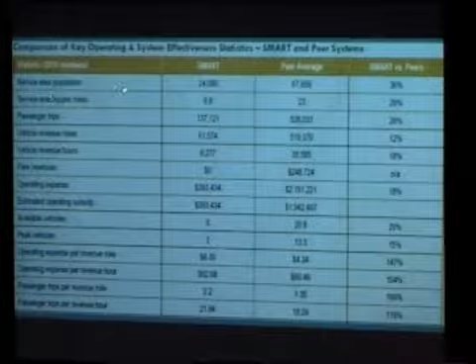They looked at things like, what's the population? Well, we're 24,000 at the time. Average system out there is like 67,000. We're a small community for transit - that's part of the difference there. So we're only running about 36% of the average.

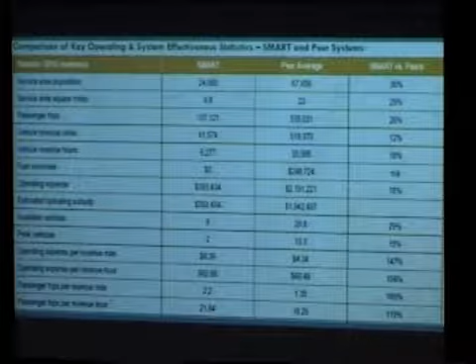How many trips do we see? Available vehicles, how big are we compared to others? What kind of expenses do we see? Obviously in a smaller system you tend to see higher prices, those types of things. So that's the kind of information they gathered on the transit system itself.

Again, you're trying to get a picture of what exists. They did identify that there are probably some transit service needs, both existing and that will continue to come to the forefront as we grow, both in population and footprint, but also in just ridership. So there are impacts associated with that.

There are a number of exhibits like this, maps in the system, again looking at the demographics of the users of the transit system. In this case, these are carless households for that 4 or 5 year period - how many people per acre, households per acre, have cars or do not have cars. You do this kind of mapping because it helps you understand where transit service might be beneficial, because people don't have cars, so transit is a very viable alternative for them if it comes by their neighborhood.

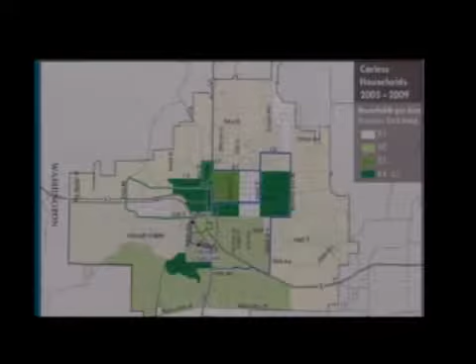So this type of mapping, there's also income-based mapping and some age mapping and different versions in there. As one would expect, a lot of this is probably university related, just like you see here. Where the students live, they may not bring a car to class, so riding the bus is a great option.

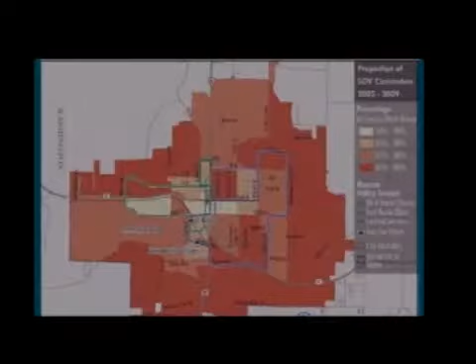Roadway and traffic operations, really, how does it work? How does the system work? How are people driving? What kind of cars do you see? Where do you see them? Those types of things. You see maps like this that are looking at a proportion of single occupancy vehicle commuters.

Remember we had 50-odd percent of people driving by themselves to work. Well, this gives you a graphic in terms of where they come from within the community. So you see a higher percentage out in these outlying areas driving themselves in, whereas closer into town, believe it or not, there are actually lower percentages of people running single occupancy.

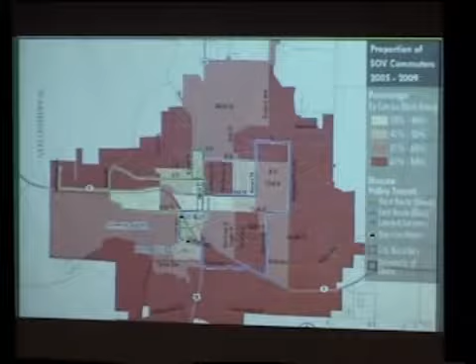Nelson: Do we have any comfort that this transit system will be here for a few years? Are we pretty positive about that? Well, it's in its 12th year. It launched in the spring of 2004, and we're still at it. It's had its rocky moments along the way in terms of who runs it, who owns it, and how we finance it. But the program seems to continue on, and we hope to keep it going.

So is there any guarantee? No. Part of that is because we're relying upon outside funding. There's federal dollars that pay for the operations of the system. We don't have fare box, and there's a lot of debate about fare box revenues and whether they actually pay for themselves or not. So we are very reliant upon federal dollars and then a certain amount of local dollars from the city and from some commercial entities, the university, here within the city. The local funding is not enough to run the program, so as long as the federal dollars continue, in theory, we should be able to continue the system.

Also in the roadway traffic operations, they looked at general volumes, what are the street capacities, how well are they performing, what's the safety, and crash history kind of information that's considered.

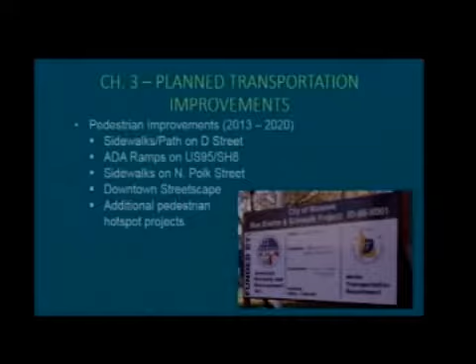Planned transportation improvements. These are really a list of things that were on the books already at the time related to what was going on. This isn't the capital program, but in Chapter 3 they include these, just saying here's some things in that 2013 to 2020 time frame.

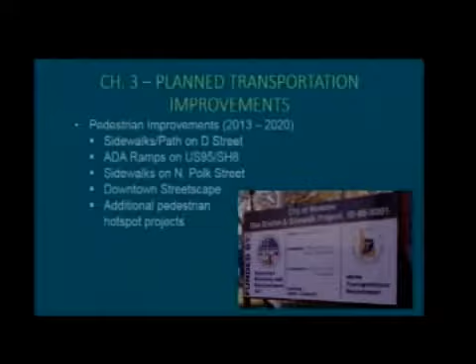Some of these, the sidewalk path on D Street in front of the middle school, that's done. ADA ramps on 95 and State 8, well, we've done, I don't know, 25 of them, something like that. There's more to come. Sidewalks on North Polk Street, that was finished this year.

We're actually looking to extend that work even further north to the city limit through a grant application that was just submitted last week. Downtown streetscape is something that's in the works, potentially will become part of an upcoming bond issue that may go out this coming spring.

Some other additional hot spots were identified through the Mobility Task Force, a subset of the Transportation Commission a few years ago, that looked at problem areas for accessibility and mobility around the community. A lot of those hot spots have already been dealt with, we've built the facilities or fixed the problems, which is good progress overall.

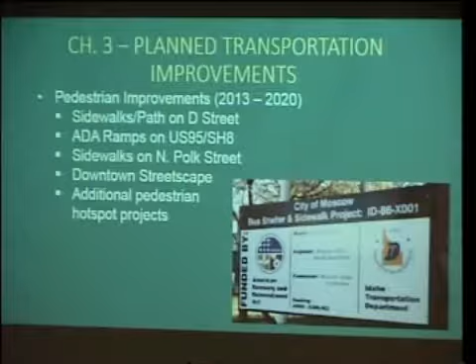I also looked at some of the roadway improvements. A Street, Peterson to Home, that thing's been on the books forever. It is now slated and fully funded for construction starting in 2019, so the end is in sight.

Mountain View Road, the 6th Street roundabout down to Joseph Street, is a grant-funded project that currently does not have a construction year, it's out past 2020. And the White Avenue to State 8 piece does not yet really have any funding. So projects that were in the overall plans, not all going to happen by 2020.

Next chapter, and we're into a different section: establishing the multimodal strategies. Chapter 4 covers roadway and traffic, what's going on with streets and vehicles. This is where it starts talking about road connectivity—is the road network connected so that people in their vehicle can get from one part of town to another without major reroutes and detours?

They looked at different quadrants, and this is just a general summary. In the northwest quadrant, one of the big issues is that there's really no connection between US 95 and State Highway 8 in the form of an arterial. Someday that will be the Rodeo Drive extension around to Farm Road, so long term there's a plan, but it doesn't exist today.

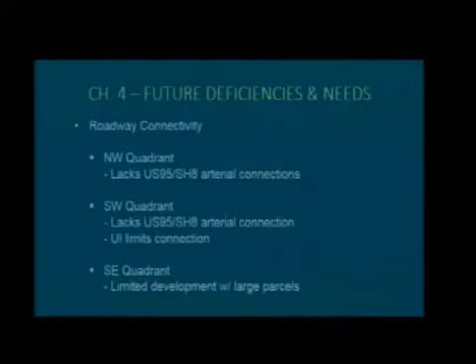Southwest quadrant, same kind of situation, no arterial route really around the southwest part of town. People cut through the university, which is not great, and the university actually limits connections because the land use there prohibits arterial road construction. Southeast quadrant, the comment was that there's been limited development out there—south of the highway, south of East Side Marketplace, with a lot of really big parcels—so there's room for connectivity as that property develops.

Northeast quadrant—what streets are we talking about? Highway 95 does connect to the Pullman Highway, and 95 and State 8 connect, but there's no connection between those up in the northwest quadrant of the city. The plan ultimately is where Rodeo intersects US 95 on the north end, it will swing westerly and then south and tie in at Farm Road by the Palouse Mall, creating an arterial route connecting those two highway systems in the northwest quadrant.

The idea is that you're providing an alternative route so not all the traffic has to go through the downtown core, but that's what we're lacking—an alternative connection. Yes, needed.

Yes, because we don't have that alternative connection, so there's no choice but to come down at least to A Street and go across, which has its issues right now, or come all the way down to State 8 and go across. When you're limited to those kind of choices, congestion becomes a problem.

Those three quadrants - the northeast quadrant, generally east-west is not bad in the northeast with the exception of 3rd Street. Obviously 3rd Street doesn't go through. They do talk about Mountain View being the primary north-south route, but it's really the only one on the east half of the city. So they suggested an additional north-south route, probably a little further east, would be beneficial.

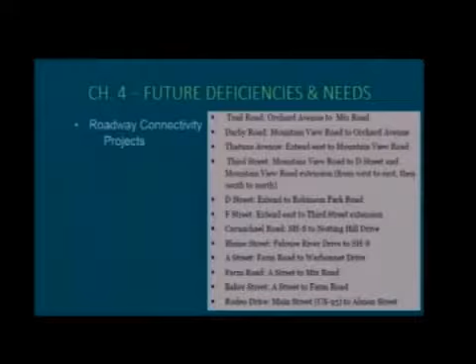They suggest some road connectivity projects in this chapter, and this is just pulled right out of the plan. I'm not going to go through all of these, but you can see what some of them are. There's the A Street, Farm Road to Warbonnet - that's an extension. That Farm Road, which I was talking about, coming around over to Mix, which would eventually tie into Rodeo, as I was just describing a minute ago. Things like that. So these are primarily, at least collector, if not minor arterial class streets.

Wes: I don't know whether I was going to wait till the end to ask a question about this, but maybe I'll ask it now since we're here. So when you see in the plan that's associated with this connection, are those right-of-ways secured?

Not necessarily, no. A lot of those are just planned corridors, and in a few cases there may be some right-of-way, but generally speaking it's, hey, this is an area that we need to make sure that right-of-way is obtained through the development process so that those roads can be extended as appropriate to support the transportation network and the land use. Because that impacts us, since we're approving subdivisions that might put a house right in the middle of one of those connections.

That's exactly it. Very good, very good. So yes, that's what those maps are intended to do - inform everyone of the need to help preserve those corridors for those purposes. Our thoroughfare plan reflects a lot of those alignments.

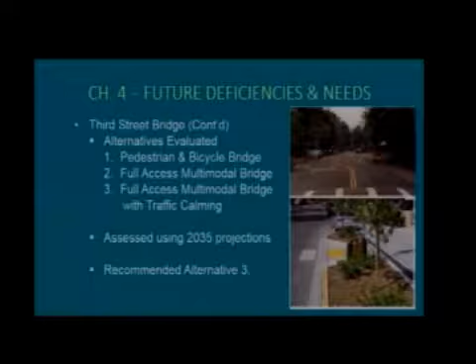That option came about because there were concerns that if the multimodal bridge was put in and traffic shifted from B and D and 6th Street over to 3rd, the volumes on 3rd Street might get excessive and detrimental to the neighborhood. So the traffic calming concept was, let's back away a little bit from that traffic. Traffic calming techniques tend to slow the speed, which is always a concern around activity centers, but also at times discourage people from using that route. So there's a balance — if you're opening it up, you want people to use it, but you don't want it to get carried away, so you restrict it a little through a traffic calming process.

That was the third option, and they modeled all the traffic anticipated throughout the system. They used the 2035 projections in their modeling, and in the end, the plan recommends alternative three, the full access multimodal bridge with traffic calming.

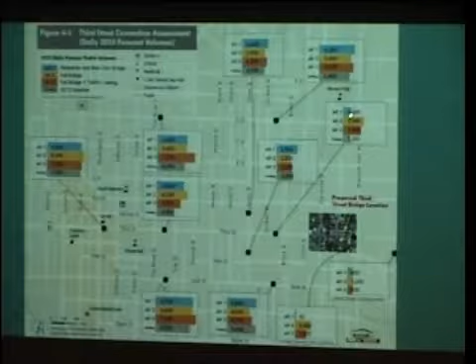They did that throughout the system, and that gives you an idea of how it's all set up. In some areas you'd see increases—obviously places east of Hayes would see vehicle volumes go up if the bridge went through. Offsetting that, you'd see decreases on the north-south of Hayes because people wouldn't have to turn on Hayes to continue on to Mountain View. So that's what these numbers reflect.

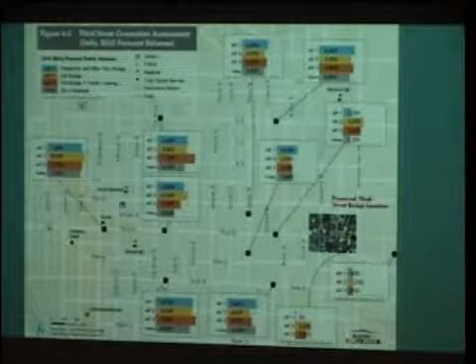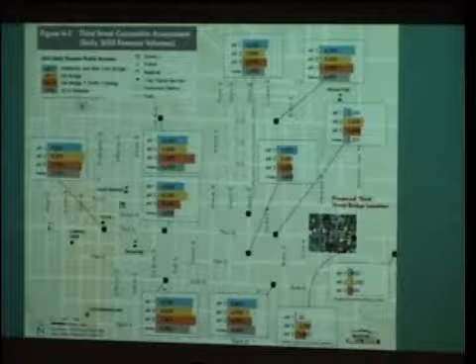How did they get those estimates? The estimates are based upon the traffic volumes that were there at the time, the information we had available from all the traffic counting data the city accumulates every year in our normal annual traffic counting program, and then they did computer modeling simulation of the way traffic flows on a street network system.

This is something you can build into a model—they do it all the time. It looks at the characteristics of the road system, what kind of volumes we have, ties all the growth projections into it, and the model ultimately says we would anticipate vehicles are going to flow here or there. As you change the constrictions to flow, like traffic calming, the model says people start choosing alternate routes, which is intended to reflect the reality that people will choose alternate routes. That's generally how the modeling is done when it comes to traffic.

It was confusing to those of us looking at this, that in 2012 it said there were 8,000 cars on 3rd Street, and then on this model it said 5,000 cars.

It all depends on where you are on the street. There are different counts all the way along the corridor, so it depends on which counts you're looking at and at what point in the corridor.

If you look at the map, it looks like it's exactly at the same place. I'm looking at 8,368, and it's just—how can it go from 83 in 2008 and 2011, actually the same figures, to all of a sudden it's 5,000? Different numbers, different years. You have to really work a little hard to explain that.

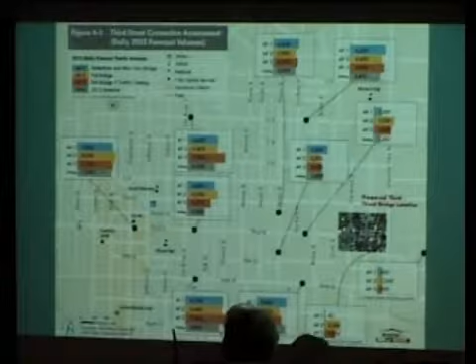I'm just saying I've got two maps, this map and one he gave me, and they both show two different figures, and I'm just asking why. Was one not at the 8,000, same place? Same place, right here on 3rd Street, just south of the high school. I didn't invent it, he gave it to me at least a couple of times, and it says 83,000 or 8,300, so I'm just asking that question.

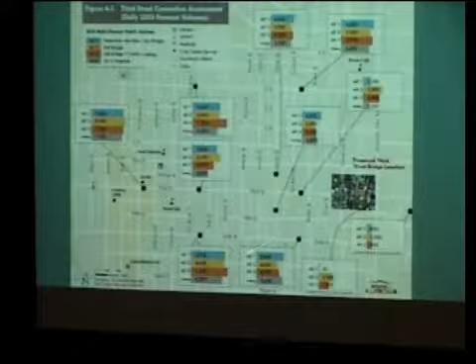As you continue east, the volume on 3rd Street decreases. As you continue east on all these corridors, the volume decreases as you progress.

It depends on the point. What really matters here is what's the change that occurs - what's the impact of doing something in the system. Does the volume go up? Does it go down? What's the magnitude? Is the starting number 5,000, is it 8,000? It varies from year to year and block to block.

I can't answer that one right now. But between 2008 and 2011, it didn't vary at all in the numbers you've given. You can look at the map here, we can just look at it together. Then 5 or 6 years later, when the traffic or Moscow population has certainly increased, now all of a sudden it's just dropped off 3,000. I find that to be...

So what is the source of what you're talking about? What is the other source besides this? What urban traffic volumes are you quoting from? Les gave me this, that's very general. He's given me this, and I'm asking why these two figures are so different.

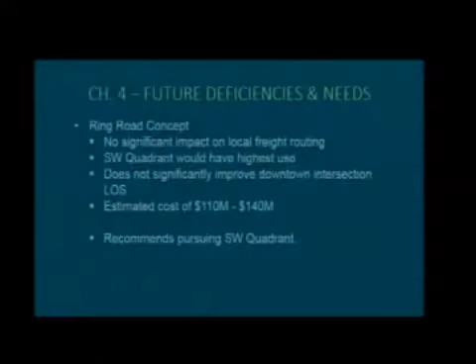Okay, so just to carry on, because I think I'll answer most of these questions. The concept, what they found based on their assessment — and they've seen these before, so they're used to them — was that they did not anticipate a significant impact on the local freight routing, because we just don't have that many trucks that would necessarily use the ring road if they're doing local deliveries. Now, you could have an effect on the chip trucks that are rolling from Sandpoint to Lewiston or wherever they go.

They felt that the southwest quadrant would have the highest use, and part of that thinking is we laid that one out with the idea that it could become part of a west bypass, highway bypass of the city of Moscow, northwest and southwest. The southwest quadrant, based on an origin-destination study done by ITD back in about 2004 or 5, indicated that quadrant would most likely see the highest usage because people are coming from either south or from the east and then wanting to go on to Pullman. So that's the leg, that southwest quadrant, that if they had a corridor, they might use. Our consultant agreed with that.

So southwest quadrant, highest use. They felt, though, based on these numbers, that it does not significantly improve the downtown intersectional level of service. It didn't really do that much for a price tag of roughly $110 to $140 million. So if you're not seeing a great benefit from it for that kind of cost, maybe it isn't something you pursue.

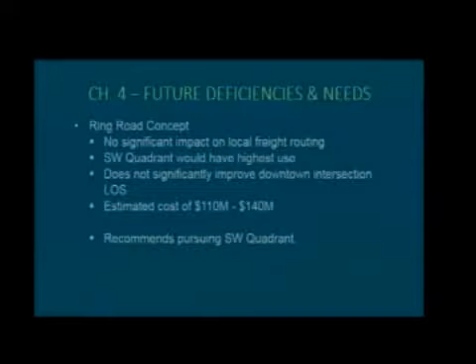So if we were going to do that, that southwest quadrant could divert the biggest piece of traffic out of downtown of any of them. It could also potentially act as a connector between the highways, and could also be part of a west bypass at some point in time. It was always thought to be federal funding, not local, and it would involve interstate cooperation.

Certainly. Les, I take it that the planning, either us or the firm, trying to find a solution for Third and Main and Jackson is just very difficult. I take it they couldn't think of a brilliant other answer. We did not ask them to look at Third and Main and Jackson.

We did not, because that location's already been studied. The study that Walter just referenced said, yeah, take half the sidewalks, take all the parking, add lanes. There goes all your other goals. You can punch the downtown traffic through. There you go. Give it up.

What Walter did not say about that study is at the time the city said, we don't think so. And so they actually modified the conclusion of the study that said, yes, you can do this, but we recognize as a community the city of Moscow does not find that as an acceptable alternative.

And they are looking at a ring road concept, and they should explore that. That's where that study ended up. So yes, you could funnel all that traffic downtown, but there are impacts on business, quality of life, and our after-hours events on Main Street. All those things make that option probably not real great for us. Thus the ring road.

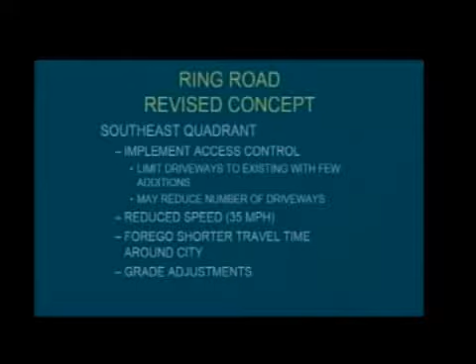But along with that, here are some of the caveats. We would want to implement access control, still trying to limit the number of driveways—not prohibit them, but limit them to what's existing, with a few additions here and there where there's no alternative. We'd possibly reduce the number of driveways in some areas, and reduce the speed from 45 or 50 down to 35. By doing that, we forego some of the shorter travel time around the city since speeds are down, and there could be some adjustments needed in certain areas, like right here. Let's see, where am I?

I have to orient myself real quick. Okay, here's Mountain View. Right in here, there's this fairly deep hole right next to Frank Bennett's house where the road just drops down and comes back up.

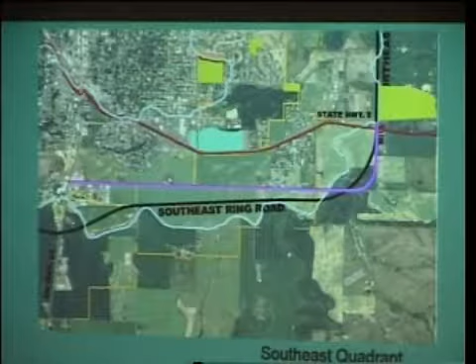We'd have to do something different with the grades to make a higher speed roadway in there work. So that was the thought of Transportation Commission as the alternative to the southeast quadrant for the ring road with those conditions and caveats.

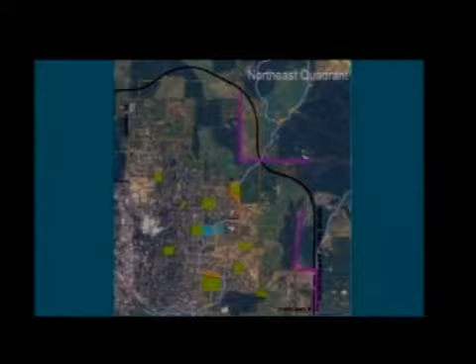Northeast was a little more challenging. This map shows in the kind of magenta purpley color the existing roads that are out there, and if we're going to try to use those, great, but generally they don't connect very well that far out. They wander off and go off to the east, so that doesn't really work.

So these were sections, Mountain View, Darby, and Mill, and Robinson Park Road, that we thought, well, okay, here's some routes that are existing we could use, but we'd probably have to connect them in some fashion. So we did identify, okay, tie it here to here, some kind of a route over here, it can wander depending on ownership, topography, et cetera.

So that became kind of the alternative, and these would really drop to more of an arterial class roadway, like a minor arterial class roadway system, rather than a more principal arterial that you might see with a ring road or a highway.

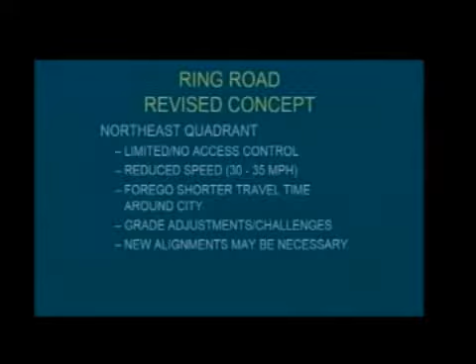And again, some caveats: limited or no access control, reduced speed, 30 to 35, depending on what the land use is around it. Again, the shorter travel time is foregone. There are some grade challenges, particularly lots of little ridges that run around up in this area. So that's a challenge to consider, and some additional alignments may be necessary to tie it all together.

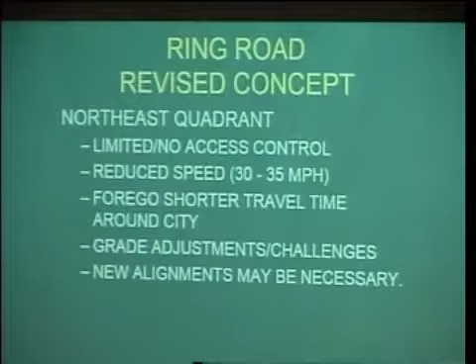So that's the work Transportation Commission did, somewhat as a result of what was in the multimodal plan, recognizing that when we're dealing with the county and their land use planning, and our own land use planning updates to our comprehensive plan, we need to have some idea what the ring road now looks like and how it's going to be categorized. So transportation has done that work.

Okay, so back to the plan. Chapter 4, intersection operations. This is, I think, the last section in the Chapter 4 deficiencies portion. It really looks at a multitude of intersections around the city based on the 2035 volume projections and said, okay, where are we going to have problems?

Well, here's the list. A lot of these you'd expect where the highways come together, or Styner intersects the highways on either end, 8 and Mountain View, White Avenue, Mountain View, no great surprises, Line Street, A Street, which will be addressed, by the way, in our A Street project in 2019.

Was there any level of service analysis on the 3rd Street and Mountain View intersection if the multimodal bridge was installed? Again, a limited number of intersections. That one really, as it exists today, didn't have any of that, so the plan didn't address that.

So some of the operation recommendations to improve those situations is reconfigure the A Street and Line Street intersection, which our current design does. It actually makes A Street the through street east-west, so we wouldn't have to stop there. Line Street northbound, as we have it designed, would have a free right to go eastbound. And if you wanted to go left, you'd have to stop and then make a turn.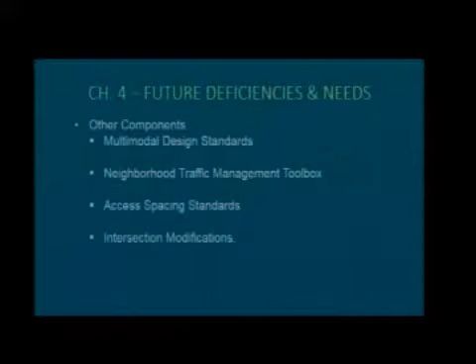Okay, long chapter. Chapter 5, active transportation strategy. This is where we get into the bike and pedestrian modes. They recommend that you have a variety of facilities out there. When it comes to biking, this is a dedicated bike lane, actually next to parking in this case. You could have on-street biking. You could have widened lanes that include bikes.

You could have dedicated bike lanes. You could have buffered bike lanes. You could have separated paths, et cetera. So look at all options to give yourself tools for different situations within the community.

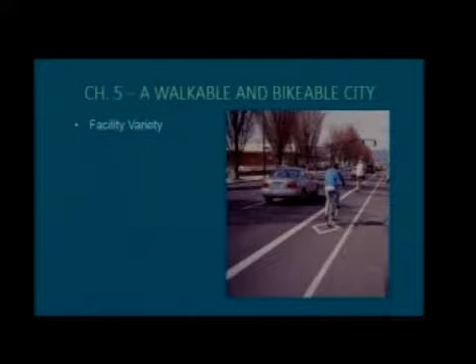Okay, and we've done some of this now. They recommend some education and outreach programs, which are things we're working on today. They also recommend development of a signage and wayfinding plan. So what you see here on the right is our signing and wayfinding plan.

This is just a portion of the overall city, showing a portion of the bike routes here in green, blue and black - different levels of difficulty. It shows the type of facilities - these little red dots are sharrows up and down Main Street. These railroad track-looking marks are bike lanes that would be going up 3rd Street by the high school. You'll see those next spring, by the way.

And then all these little circle designations represent destinations - X1 is the downtown core, V1 is the Latah Courthouse, R1 is the high school. Those were identified destinations that people might want to reach on the bicycle network.

And then these little guys here, like number 2, number 16, number 1, number 75 - those are locations for signs, for wayfinding signage.

So in this particular instance, number 2 is an intersection of a green route and a black route. At that point we need signage that says turn right to go here, turn left to go there. So this map has been developed - the Transportation Commission worked on it as well. We're refining the number of destinations on the signs so we can start manufacturing them, and those will start going up next spring, maybe even this winter. So that's in the works.

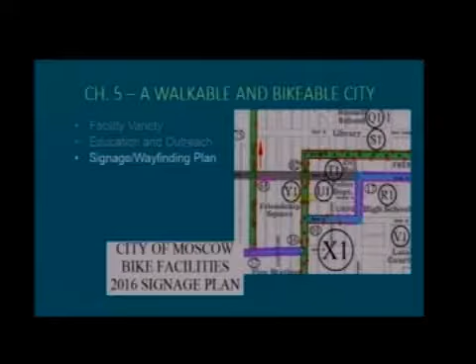And these came out of this bike facility signage plan, 2016. That little green line above the 1912 building - that ends right there, though, doesn't it? It has a turn, this little green guy right here?

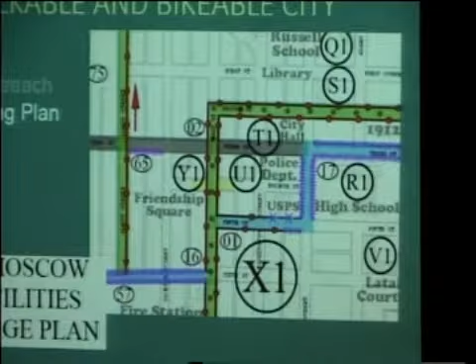No, this is actually part of our Greenway, a route that's already signed in terms of the route itself. It wanders over here and up into this part of town, takes it all the way up north of East City Park, to the north side of the middle school. It now traverses that brand new trail we just built this summer along the west side of the middle school parking lot, goes all the way south on Cleveland clear down to the fairgrounds, swings westerly, works through that neighborhood, comes out near Lewis Street, crosses the highway, takes you onto Main Street, and brings you right back to here. That's the Greenway route, and that's in existence today.

The sharrows are on the ground. The Greenway route signs are in place and have been since about June. So no, it doesn't stop there and drop off at the edge of the map.

Yes, sir. So wayfinding signs were added in Fort Collins, Colorado, and I was biking around there, and one of the things that was really annoying was the size - could I just interrupt you for a second? Sure. I should have said this before, but when you ask a question, could you please say your name so it goes in the record? My name's Robert Peckendorf. And your address? 611 Hathaway Street.

Former Transportation Commission member. That's true. Thank you. It's nice, we're just trying to keep track of good minutes.

When I was riding around the city, they have these wayfinding signs, but the font is really, really small. Too small. You don't have to actually get off your bike, but you have to get really close to them because they try to put a bunch of information, 6 different destinations, on there. Too much. Ideally you'd like it big enough so you can ride by it, but at least having that size as a consideration would be really nice.

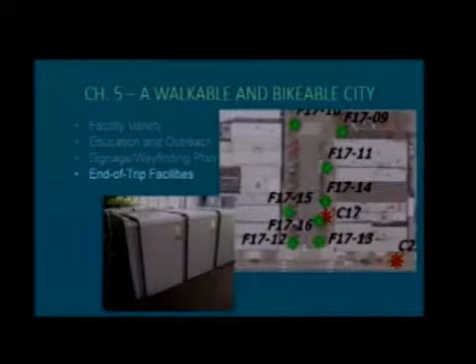On the left, this is a picture I took at University of Washington—this is covered, locked bike storage. You ride your bike there, and of course it rains in Seattle in the winter, so you don't want your bike completely soaked at the end of the day. You rent one of these things, put a bike or maybe two or three in, lock it up, and at the end of the day nobody's messed with it, and you hop on and ride it back to your apartment or wherever you live.

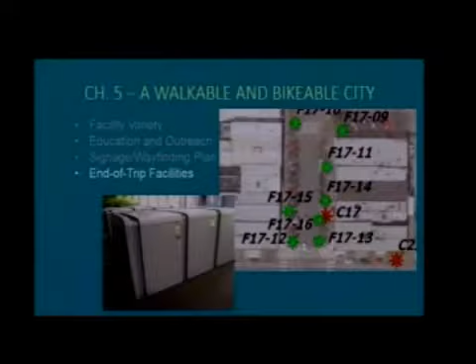Obviously these kinds of things take a big footprint and have a pretty good cost, but there are other types of facilities, whether it's covered bike parking like the university has looked at a little bit—I see Becky's here and she deals with some of those things—or other amenities beyond just parking, maybe repair stations or air stations to pump up your tires, different types of things like that. So it's recommended that we consider end-of-trip facilities to help promote bicycles as an appropriate alternative mode.

And encourage people to ride their bike to work or to business, then have facilities that accommodate it. Maintenance policies—take a look at our maintenance policies. Are we sweeping the roads sufficiently? Are we clearing snow sufficiently? Those types of things.

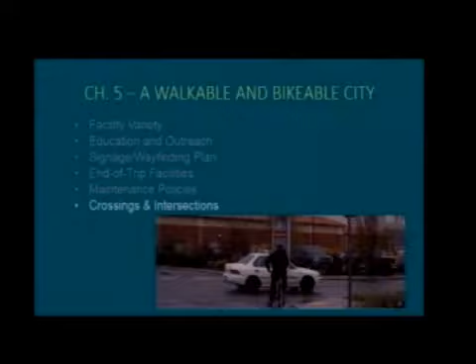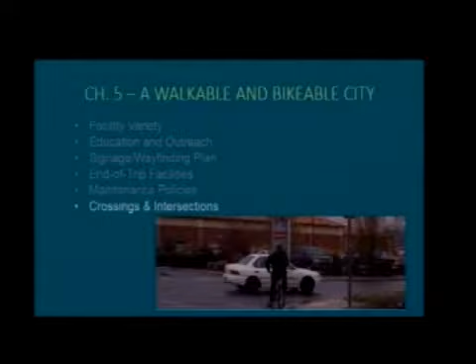And crossings and intersections can be a real detriment to folks, either on foot or on bike. This happens to be near Gritman, just an example out of the plan, where there's a potential conflict that people have to navigate. One instance we're real happy about in terms of its current progress is this one.

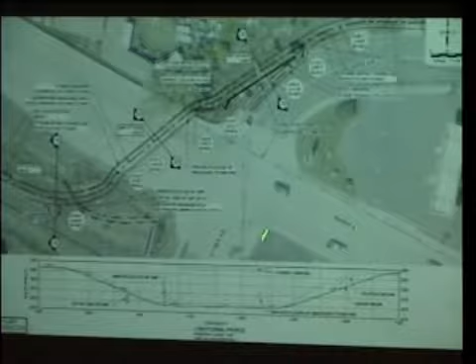This is the intersection of State Highway 8, Troy Road, and White Avenue—Steiner, right? Tesoro gas station here, Paradise Creek right about there, cruising through. Right now this intersection has no control on the highway—it's got stop signs north and south. It's not as wide as it used to be; it used to be tremendously long to cross. ITD narrowed it a bit when they rebuilt it in concrete, but it's still kind of a wide open area, speeds are still up there a little bit, and pedestrians don't always feel comfortable running across this roadway.

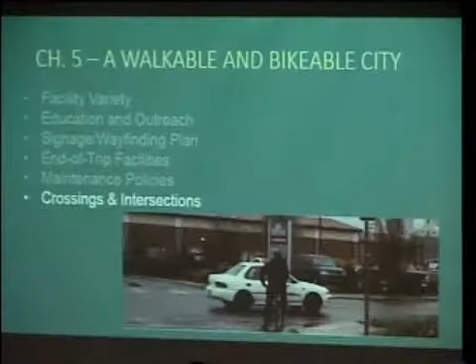So this is a project on the verge of funding through the state. It's been selected, and just needs approval from the ITD board, which I think happens early next month, to build an underpass that'll take a trail underneath the highway alongside the creek and back up to the Paradise Path. So that's in the works as our first major crossing project to fix this intersection concern identified in the plan.

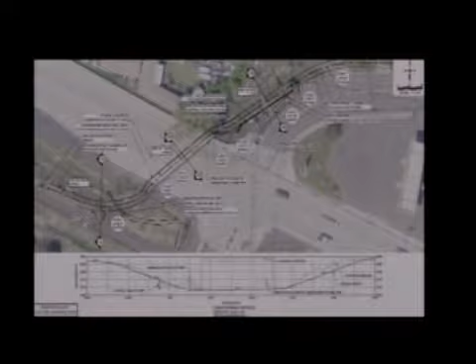This is one that Transportation looked at some years ago, and certainly the Paradise Path Task Force looked at it a lot—now the Paradise Path Trails Commission. We were successful in the grant and anticipate it would go to construction, I believe, in '18, if I remember right, or '19, somewhere right in there. So this will be a good thing.

I love this. I get killed there, so I go down to Blaine and cross at the light. What are you going to do? There's cars doing everything right here at this corner.

What's not shown here is the other end of the project. Right now we're picking up the path, going underneath, alongside the creek, coming back up to street grade, and then it continues east on White Avenue, clear over to the fairgrounds. So that'll be a nice addition all the way down the north side of the street to the fairgrounds. We're happy about that one.

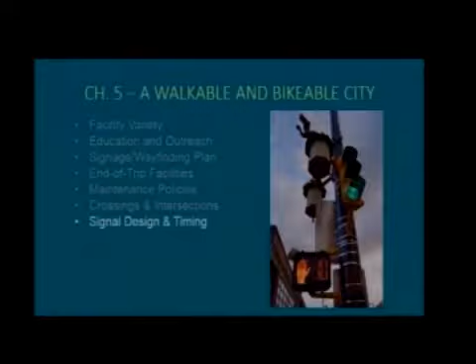Signal design and timing, especially when it comes to pedestrian crossing and bikes to a certain extent, has an impact on the walkability and bikeability of the community. Things like countdown signal heads, which are now on all of our signals around town, weren't there back then. They help pedestrians understand how much time they have to cross — not just a flashing or not-flashing hand, it actually gives you the countdown. Not intended to, but it also provides information to the bicyclist riding up, who can watch that countdown and understand when it's going to change. That's beneficial for overall pedestrian safety when they step into the road — if it's down to 2 seconds and you're not the fastest walker, you just wait. You don't get caught out in the middle of the intersection that way.

I have no idea where this picture came from, because these look like little dragon lights up here. I'm not quite sure — Chinatown somewhere.

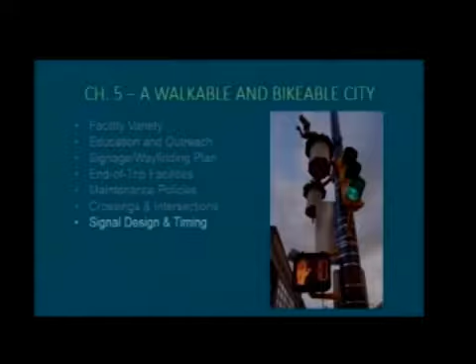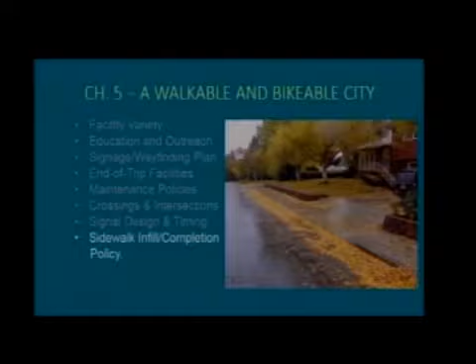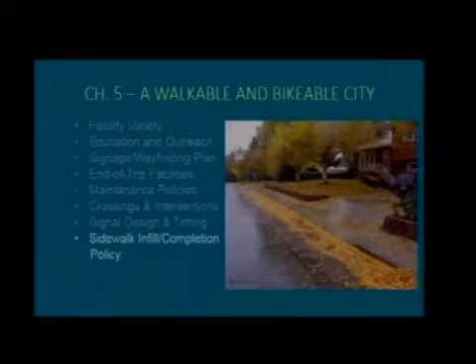Sidewalk infill and completion policy is recommended, and we're doing this somewhat informally. We do have a sidewalk program every year, and a sidewalk policy formulated through the Transportation Commission and adopted by the council, which talks about how we prioritize. We apply for grants every year, and we have city money that goes every year towards sidewalks. This is one of them that we built not too long ago. We've gone through the Safe Routes to School program, we're doing ramps through ITD, and there's a whole bunch of sidewalk work going on. We're doing a lot of the things the plan recommended to infill and solve problems out there. There's a lot to do, but we keep chipping away at it every year. In the last 10 years we've probably put in 300 ADA ramps or some crazy amount — it's wild, it just keeps growing.

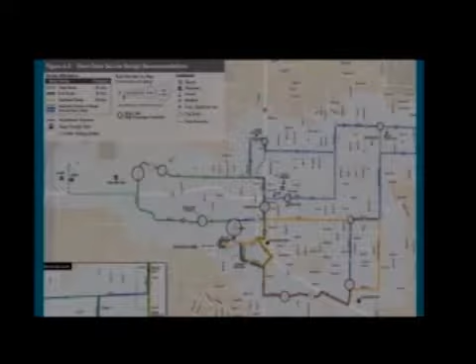This is one where they were looking at a third route. If you recall, right now we have an east route and a west route. Here you've got a kind of a green west route, a modified bluish east route, and then they add in this yellow route down here, so they kind of split the territory a little bit into three potential routes. The long-range version has something even more extensive. I think it has a crosstown express type of thing, and I don't have a map of that today, but those are in the plan.

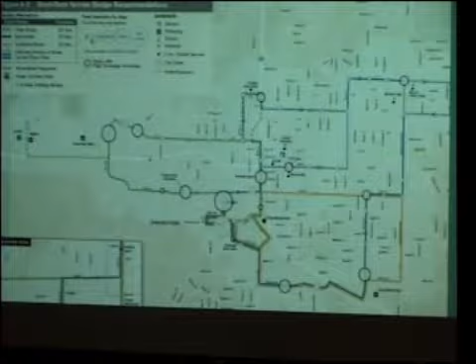So they were looking at how service can be improved overall. It's something that Transportation Commission should be taking up again here fairly soon, along with the folks from SMART, Jenny Ford, to talk about maybe some potential near-term upgrades.

There's a bunch of tables for different types of amenities that could be constructed. And then the concept of supporting the vision: how do we go out and promote the transit system to make sure ridership stays up, to answer Nell's question, and make sure the system sticks around in the long haul? There are different ways—branding, multimodal access, what types of vehicles you use.

As an example, okay, Chapter 7. This one's very brief—it has to do with parking and TDM. The chapter's only about 3 or 4 pages long. It really just talks about managing parking downtown. When this was written, we had just gone through a very extensive downtown parking discussion at the council and community level, made some modifications to the overall parking system as it relates to the downtown parking lots, and concluded we think this is good and let's stick with it.

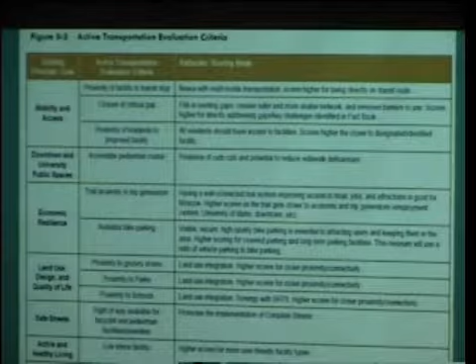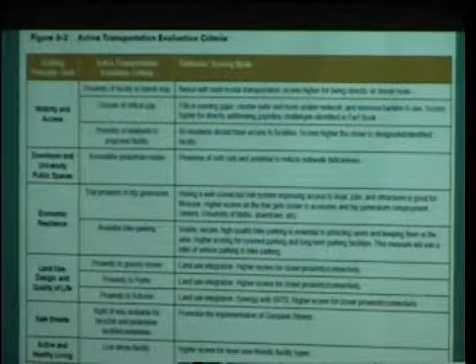For instance, mobility and access right at the top—then for the evaluation criteria in the second column, it lists proximity of facility to a transit stop, closure of a critical gap in the system, and proximity of residents to the proposed facility. Those are the kinds of criteria used to assess the priority for each identified project, with descriptions of what all those mean.

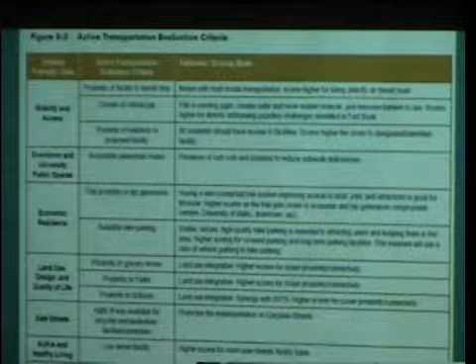Funding is touched on. It's always a question, always a problem. Depends on the mode, depends on what's available, what you're trying to build. So they don't spend a lot of time on it because they don't have a lot of answers, but they do list some alternatives and some options you could pursue.